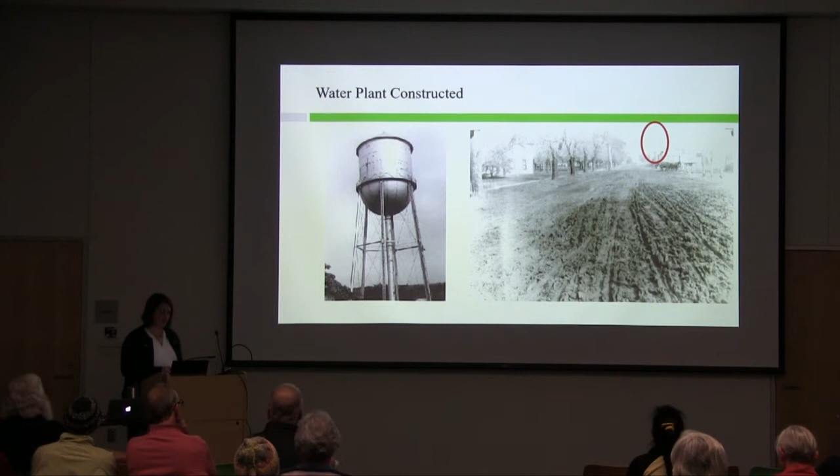So you can see here where you're at - you're on East 5th Street. There's a water tower right there, that's the Anson Marston design tank. And we ran our first water main with our first well, with the caveat that you only could use the water for fire protection, which didn't really matter because most people had their own private wells for their drinking water in their houses. But the main purpose of our water utility in the beginning was for fire protection.

We had several expansions over time in the 1920s. It was first an iron removal plant, so we just removed iron. And then eventually we expanded to have lime softening removal, the lime softening process, which removed hardness. A lot of you still recognize that tower on East 5th Street. It is still there currently, but that will eventually be coming down.

So we had several expansions over the years. In the 1960s, and then again in the 1980s, we went from a 4 to a 6, and then from 6 to 9. And then ultimately in the 80s, we became a 12 million gallon per day plant. And I say 12 because we really only felt comfortable at about 11.

This is a picture of the water utility until recently. You'll note here, let's see if I can get this laser pointer to work. Here we are behind the power plant. We were here in this location. Here's this 5 million gallon reservoir, and that still is in service today. And we added that capacity.

We got to 12 in the 80s, and then eventually in 2007, we began thinking about what the future of our utility should look like. And after a 10-year-long process, where we first evaluated if we should expand on that current site or move to a new site, eventually it was decided to move to a new site.

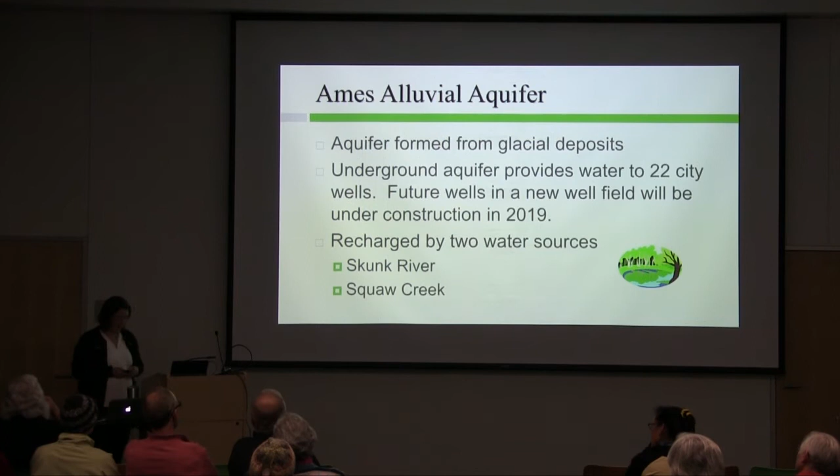Okay, so let's move into the history of the Lowhead Dam. I want you to understand the utility a little bit and about where our wells are, so we can get into why the Lowhead Dam came about.

So in 1976, we underwent our 3rd straight summer with lower than average rainfall, and we were starting to have threats to crops. The total precipitation from July to December was 3.4 inches, and normally we would have about 32 inches over the course of a year from that time. So we really were suffering from water, not having enough water.

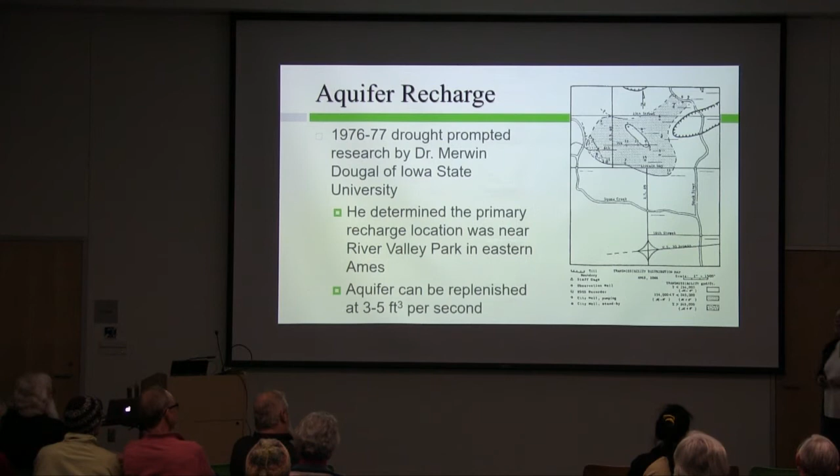Obviously we've studied it a lot since 1977, but at that time Merwin was doing some research. We've got these piezometers, these observation wells all over the city, so we can look at how the water table is dropping as we're pulling water. Back in the day, now we can put transducers and I can read them at the plant on a continuous basis - not that everybody had to go out and manually read everything, and we were doing that in some places daily, if not twice a day.

So Merwin had done some research, and he found that there's a specific area where it seems like - I didn't have that bigger picture - but the water comes down the Skunk River, primarily a little bit on the east side of the river. There's a huge channel underneath there, and at this particular spot, it turns underneath the river. And we know that it turns and feeds our downtown wells. You see some numbers here.

These are our downtown wells, many of which are still in service. There's a direct correlation between the water coming from here and going to our downtown wells, so that portion of the river is really recharging that downtown well field. We're replenishing at 3 to 5 cubic feet per second, which is a really high velocity. We move water underneath this town like crazy.

If you're a geologist, you think about thousands of years of water, but we have young water in Ames. Dr. Merwin Dougal said that if we could find a way to put water in that area, we could help our downtown wells. We have all these well fields now, but we didn't have that many back then—only the downtown well field, and ISU had their own wells. We didn't have the southeast well field or youth sports complex yet.

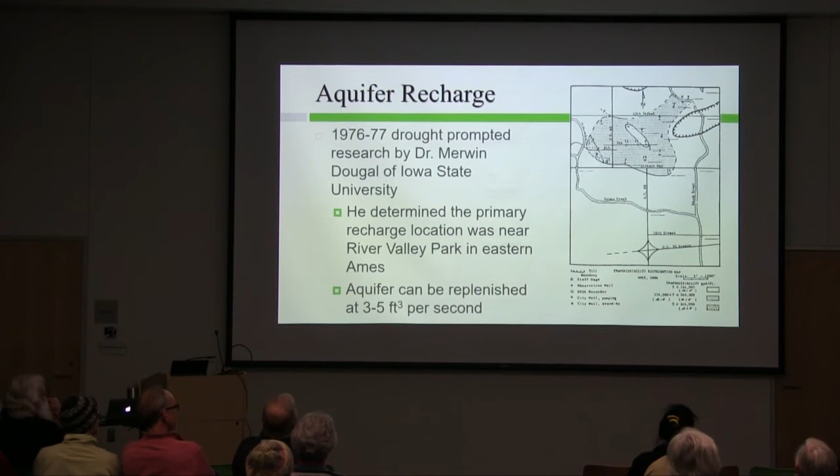With that research, he met with Tom Newman and Harris Seidel, and they developed this plan to pump from Hollett's Quarry. We thought they could replenish the Ames wells with that. So they set up temporary pumping at Hollett's and got permission to do so. They began pumping on July 12th, pumping 11 million gallons per day from Hollett's, which was a tremendous amount of water.

On the 14th day, it finally reached the sand dam that they built at that location, which Dr. Dougal had researched. I've got some pictures of what that looked like. They continued pumping about 8 million gallons per day, with roughly 75% of it reaching the dam, which is pretty good recovery. They saw immediate results in the well field.

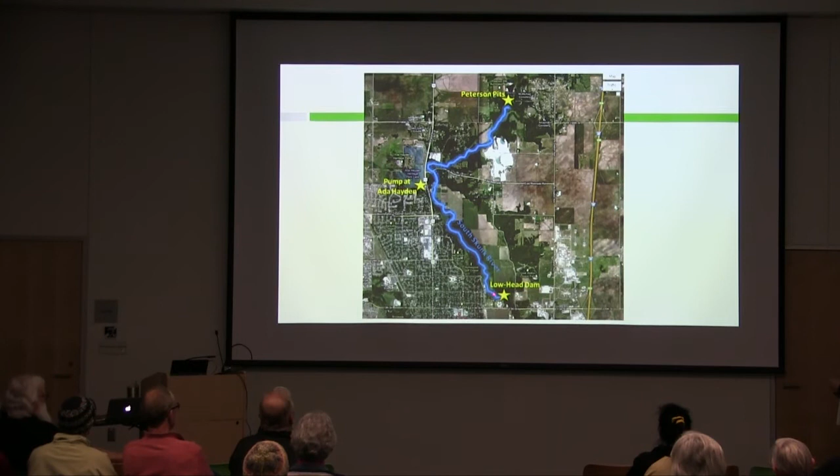Harris would tell you it saved the day. They were about ready to start shutting off water to sections of town. They were already under mandatory conservation, so any usage above your winter usage, you were paying 9 times the amount, which was a billing fiasco, is my understanding. We had this great idea, but how we billed people for it was complicated, apparently. But this is what it looked like, the sand dam.

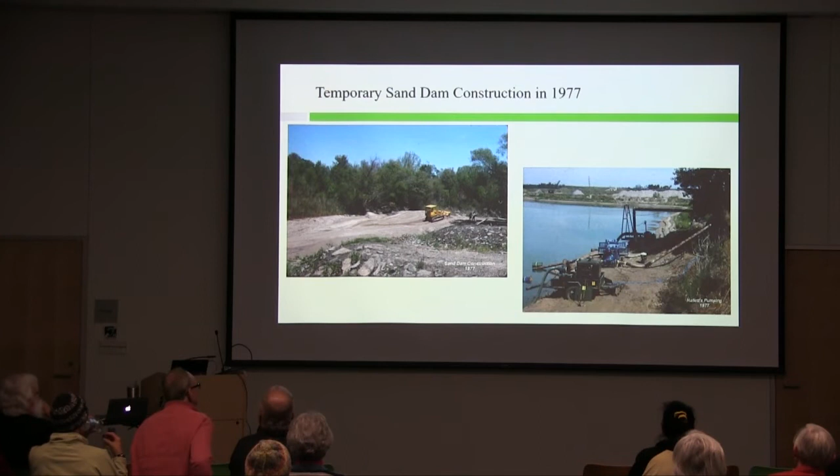In August, a 7-inch rain occurred and washed out the sand dam. A total of 13.5 inches fell between July 28th and August 31st, ending the drought. The heavens opened up and water came down. It was great—I can't imagine what everybody at the water plant felt like during that time. If you were to go outside and do a rain dance, I'm sure they were doing it and jumping for joy. They did leave continued water rationing in place until the end of September, despite the rains.

Just out of an abundance of caution, and like I said, we were billing customers 9 times any amount they were using over their winter water usage. ISU kept their water system in place until November 10th, then shut it back down, and they've been our customer ever since. We do have 2 wells that we use from ISU. Of course, the Power Plant has their own wells.

Finally, after the 81-82 incidents and the 77 incident, they decided to construct a permanent dam. In 1984, a huge construction project was undertaken to put a permanent structure in there where we could put flashboards in times of drought to raise the elevation of the river, pump from the quarry or Peterson pits, and we had those options available to us.

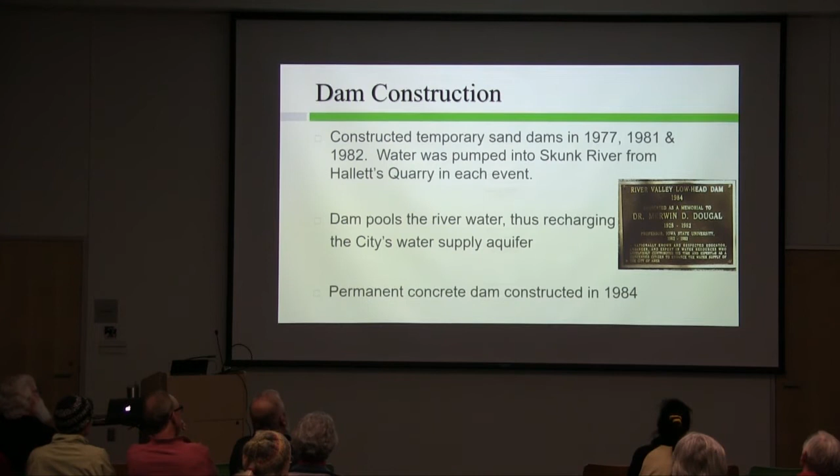Some construction photos of what the dam looked like. Again, I really wish for this kind of construction weather - you notice there's a pickup truck right in the middle of the river. They were able to pump around, and they had really great conditions for pouring this dam.

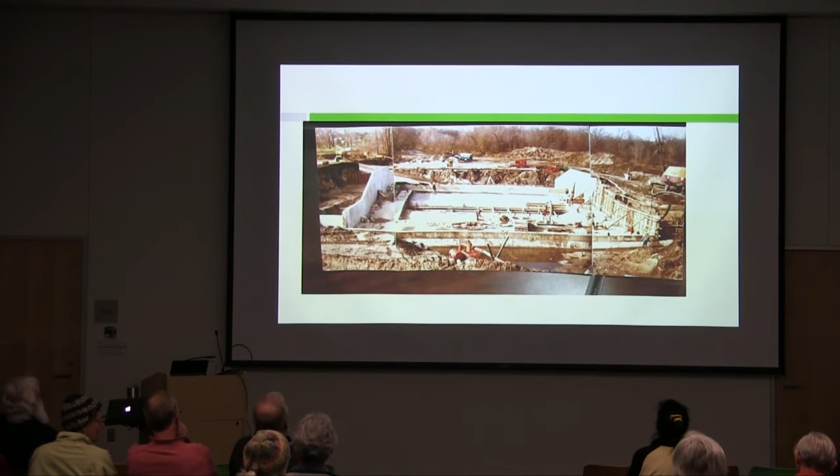A lot of you see these wing walls, you recognize those. This is what's underneath the river. This was actually shared with me by Jim Gammon, a civil engineering technician still for the city. I didn't realize he had been the inspector on the original job, so he found this photo and shared it with me.

I was mentioning flashboards, which our Public Works Department really loved doing. They would take these metal sheets - well, now I think they're lifting them right here. We got a little smarter later on and lifted them in. We would secure them to the angle iron on the dam, and then we would pool that water upstream. If it got to a certain level, then we could pump from Hallett's Quarry.

So this might be what it looked like before construction started here.

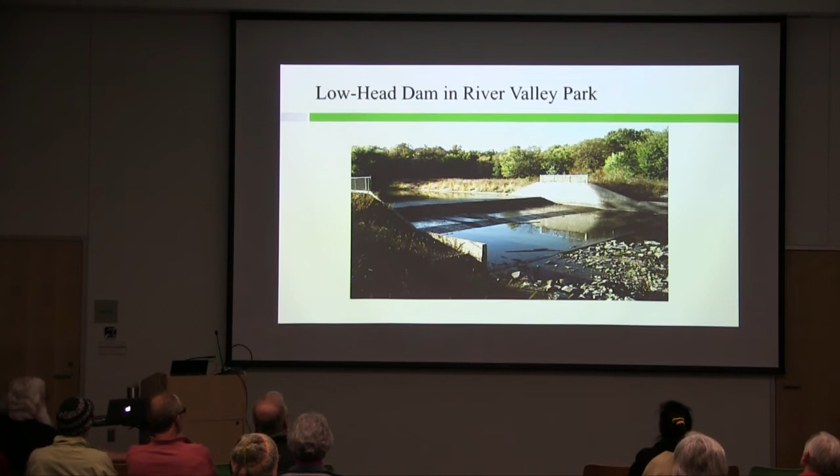A little bit about Ada Hayden, just a sidetrack - we purchased Ada Hayden in 2002. During the drought of 2000, we couldn't pump from Hallett's Quarry, Ada Hayden, because we didn't own it - it was owned by a developer, so we pumped at that time from Peterson Pit. But in 2002, the city thought ahead and we purchased Ada Hayden, formerly Hallett's Quarry, and it's now Ada Hayden.

So we do have a permanent structure in place, an outlet structure, and a pump that we use in times of drought to pump water. A lot of you have walked past it if you've been out to Ada Hayden. We can actually control that gate from the plant. We read it, and when the water starts getting high in the South Skunk River, we shut it in times of flood so we don't get backwater up into Ada Hayden. Then we can monitor the lake level from that spot.

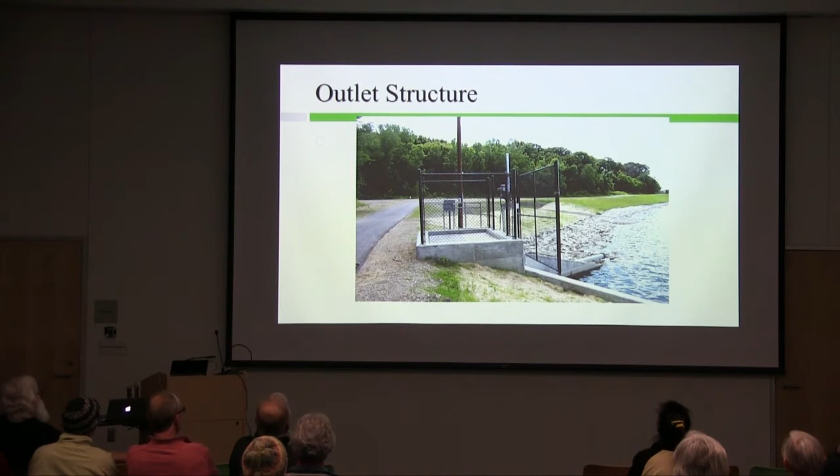I'm click happy tonight - that's a picture of the outlet structure.

We now have a protocol in place to look at the river levels to decide when to start pumping. We probably preemptively put up flashboards in the past and started pumping prior to having issues. We can monitor all of our wells now with transducers and watch their drawdown. We have a lot more wells now, so we're not having to pump as much - we can rest those wells, which helps recharge them. We have a lot more sophisticated protocol in place when we get into times of drought.

Like I mentioned, the guys used to go out almost daily to do drawdowns in the summer. But now we have transducers, and we can bring that via radio back to the plant. So at any given time, I can tell you what the level is in any well. That helps us as we're preparing for drought.

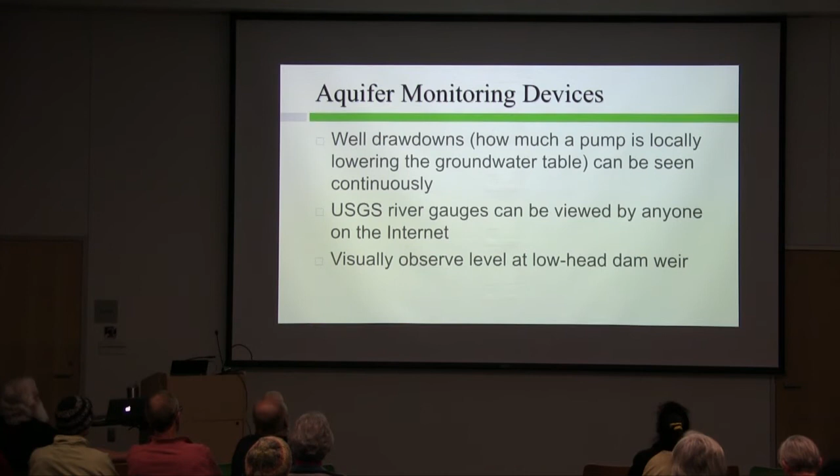And of course, we have USGS gauges that help us monitor the river, and we contribute to the funding for that because it's important to us, and monitor the weirs of the dam.

So many of you have heard about a project at the Lowhead Dam. It started, I would say, roughly 2007, 8-ish. Piper Wall, who's a paddler, approached the city concerned about the hydraulic recirculating effect that low-head dams can cause. We've had, not at that dam, but other dams, people die from that. There was a push for more funding to mitigate those concerns at low-head dams.

We had about $50,000, and at the time I had two engineers on staff. I had a couple of these little projects, and I said, okay, who wants this project? It'll be quick and easy. They still like to make fun of me to this day about how it's not been quite quick and easy, but I think it'll be worth it in the end. So it started as a $50,000 project, but we hit a lot of hurdles.

We had some project goals. Things like safety was paramount, so no matter what happened with the design or what we decided to do, our most important thing was to mitigate the safety concern there. However, as time went on and we had the paddlers involved with us, we realized there are other project goals we need to be thinking about besides safety.

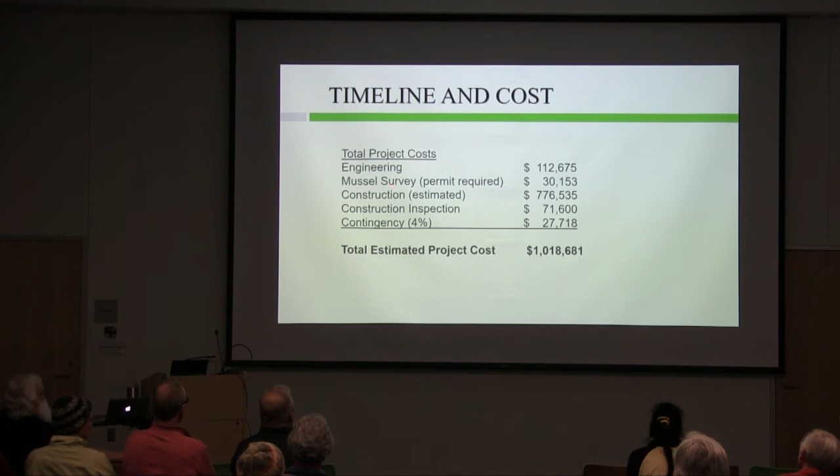I say estimate because we're not done with construction yet, but we awarded a bid to RW Excavating out of Prairie City. They've done the Easter Lake restoration project, and they're going to be doing the Hickory Grove restoration project coming up. They're helping us, and hopefully we don't hit too many snafus. I've got some contingency, which if you're an engineer, you know that's not a lot of contingency in construction. But we're making progress.

Okay, we are making progress. For some of you guys that have been in this long haul, you know you just got to stick with it, right? So we awarded that contract back in April.

We said, we're getting submittals, looking at rocks, all those things done. The contractor said, we're going to start in August when it's dry. Was it dry in August? For a week, it was dry. They literally set up a cofferdam to start dividing the river, and we've had higher than average flows. I was telling Greg that we had a graph showing our flows versus historically, and we're just way above it. So we did not get anything done this fall due to the flooding.

So let me see if I can, some of you may have seen this little video we put together. We're trying to shoot some drone footage and make sure you guys can see what's going on. Let's hope I don't.

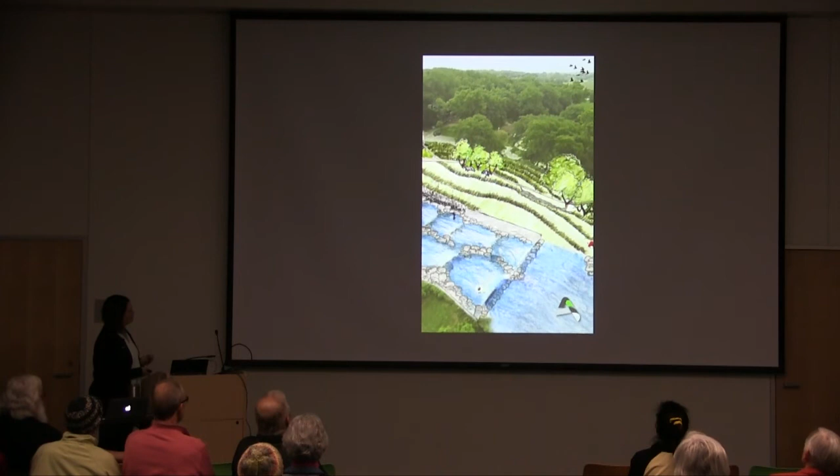So let me show you a few more pictures. I promise there'll be more to come. It's like you're writing a really important email to a colleague and YouTube wants to continue - usually it's animals and memes, so it's pretty cute.

But okay, we're trying. I do like Dan from RW. He's like, if we can get in there, we're going to get in there. I like his attitude - E for effort so far. But we've been trying

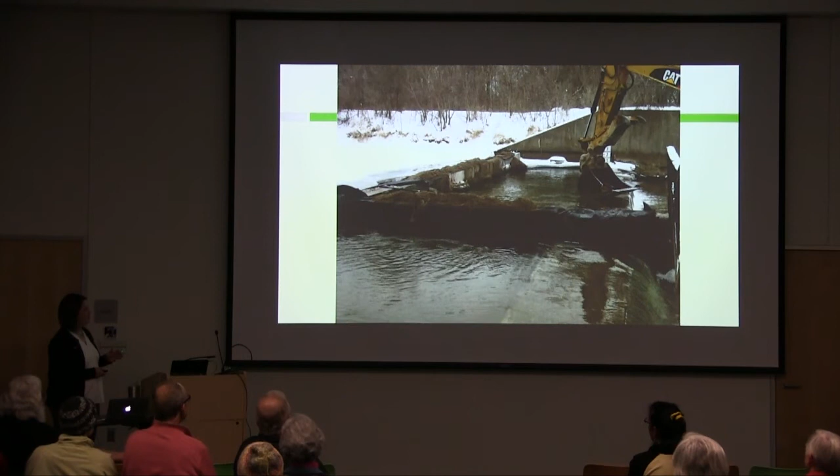really hard to build the north side of this structure, and they're trying to seal it off. There's a lot of water still flowing in this river right now, more than there normally is.

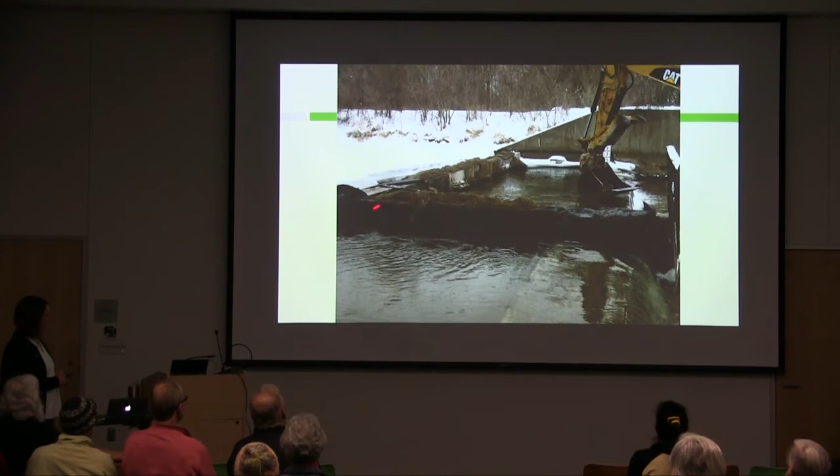So if you're looking, here's the sill of the river, this is upstream. He was trying plastic, not working. This is a picture just downstream - we still have that hydraulic jump. He's trying to work over here and push all the water on the south side. When he does that, he kind of backs things up.

He tried to get in, it was like 8 inches thick of ice. So we came back in trying to clear out some of it because we were afraid - if we had that warm up, we were going to cause an ice jam. There's a lot of ice on that river that's going to have to move down, so he's trying to clear some out.

Here we are, this is more recently. I'm showing you this, but I know you're not going to go onto a construction site and take a look at things. But we have the cofferdam over here - Parks and Rec had this old pedestrian bridge that makes it really nice for me to cross the river and see what's going on right now. Glenn too, he appreciates that.

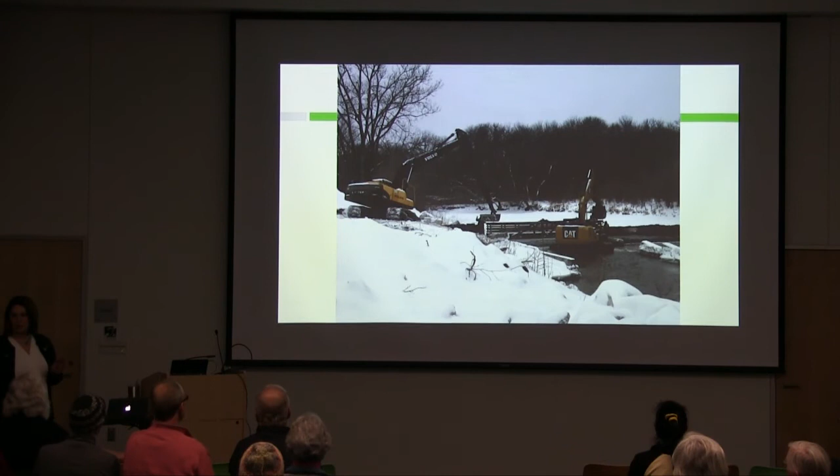But they're trying to dry this area up with some concrete blocks, so on that north side they have to pour a little concrete on the dam. That's our goal - in fact I had a conversation today about that. We're trying to pour some concrete to get that first weir set of rock, so we're still trying to pour concrete, and it will be cold, and they'll have to heat it. It is complicated construction.

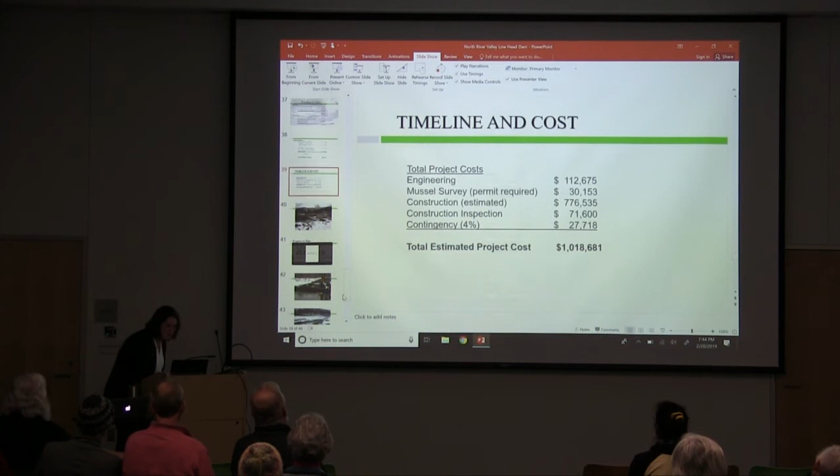I know a lot of you know this area is closed off, right? That area is closed off because we've got a lot of equipment. We haven't had too many - we've had some truck deliveries of rock, but there's still a lot of rock to come.

So we're going to work - the contractor is going to work as hard as they can for the next few weeks before the spring thaw, and then we're out until things get back down. And if you ask me when the construction will be done, I'm not sure. I tried to make those predictions last year and it didn't work. My last name is Murphy, so we know we never try to make predictions.

So we're hoping for a fall ribbon cutting now. We already started in June, but I think we're more like a fall ribbon cutting, and of course we hope everybody can come out and attend that. It will hopefully be in conjunction with the water trail dedication as well.

So the Low Head Dam is the first phase of several improvements at the parks. I know they have plans to eventually put in a drive-through and a lot more parking to improve this, so there's more - you're able to get through more. I know they're going to replace the shelter that's there now, upgrade it, and hopefully bring in some more restrooms. So there is a long-term plan that Parks and Recreation is mapping out and starting to put the funds together for how they're going to do that.

What's that motto? If you build it, they will come. We think that people will come and want to recreate at the Low Head Dam. It'll be a safe place for people to be.

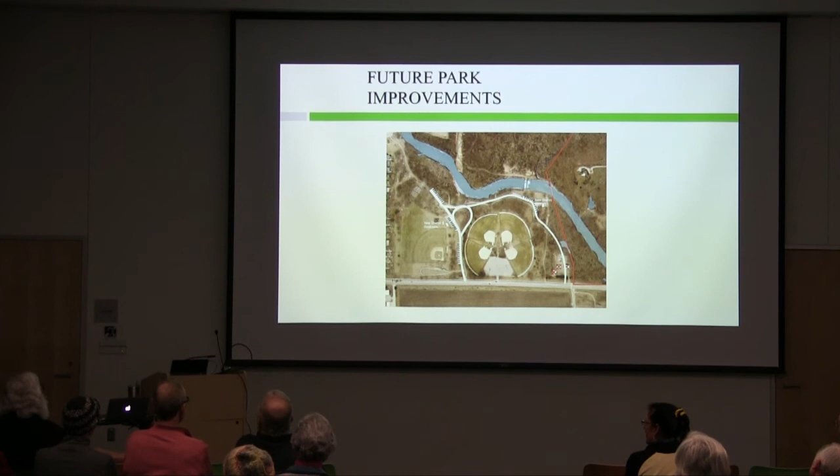With that, any questions? Can you go back to the slide that shows the illustration with the boats? Sure.

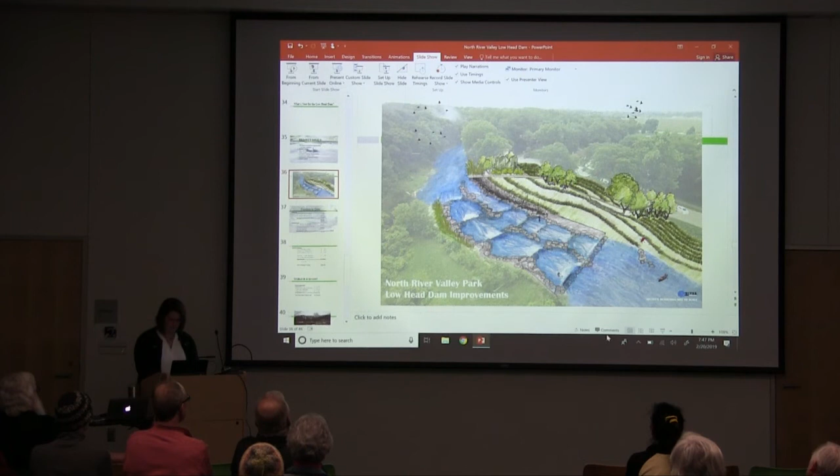I've looked at the one on the sign down there, but I'm very disoriented. Sure, so where is upstream? Is it on the top? Upstream's up here, I know. That's okay, so you're going this way. So the launch, or whatever you call that thing - wait a minute, is that a road going out there?

So this will be a concrete path, okay, and it will serve also as the boater launch. It will replace the portage that's downstream. Okay, so wait, I'm still confused - so that's not where it is now? No, it's down here a little further.

Okay, so if I'm walking from, let's say from Car Park, going down on the paved river path, where is that on the right-hand side of this picture? Right there. Okay, comes up here and you kind of cross over up here.

Off stream, yeah, so there is a portage right here, which will still remain. So if people aren't comfortable going through - this is not their cup of tea - they want to take it from the downstream and play around, you can still get out. If you become a person who wants to keep going around and around, you can put in, you can come out right here, and there'll be a means to get upstream and see this. You can come in and then try and play again. So you could actually go upstream the way it's designed if you wanted to. So you would have to come out here and go around.

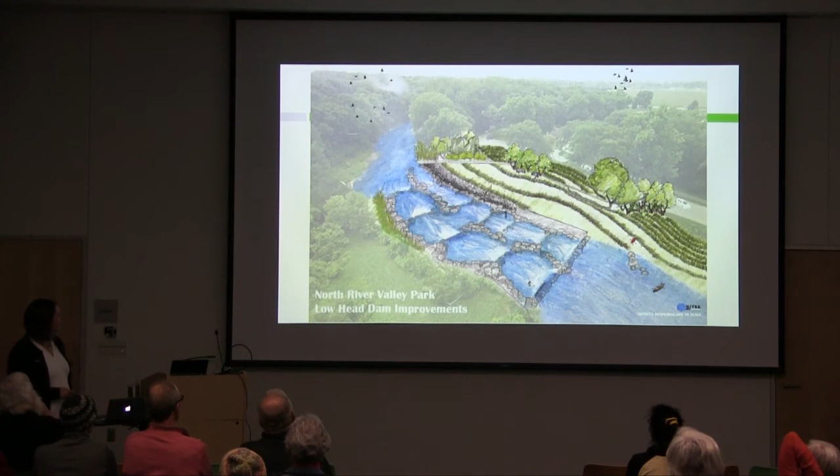Now, it's possible - I know I've watched Piper, she comes up from the backside, so there could be some playing back in here, the beginner area, which is where I would probably be. But you could come out - there'll be a little rock outcropping here to try and shorten that portage because we know it's long, to come around and then start to play. Now you can - there's no reason why anybody can't go down this, it's just designed for fish passage. So okay, so may not be as fun.

I don't know. So really what I need to keep trying to focus on is that north is this way. Which way? Yeah, we're over here, okay. All right, so you notice this wing wall, it does stay in place - we didn't take down both of them. This one is already cut, actually, and we'll blend this hillside. Where's the measuring sign? Right there.

Okay, so I guess then if I'm coming from like Ames Road area down in the boat, I could be doing that, right? Mm-hmm. Okay, then do I go over the different rocks there? I mean, is it like a little... Yeah, so provided there's enough flow, it is designed to pass you now.

Before, we were telling you to get out and go around. Okay, it is now, I get it - designed to safely pass you down these channels. Obviously a lot better through the boater passage because it's a little deeper through there, but if enough flow, you can go through the fish passage as well. Now I get it. I'm sorry. No, you're okay - it is aligned a little awkwardly than what you normally think, so you're not the first person to ask me that.